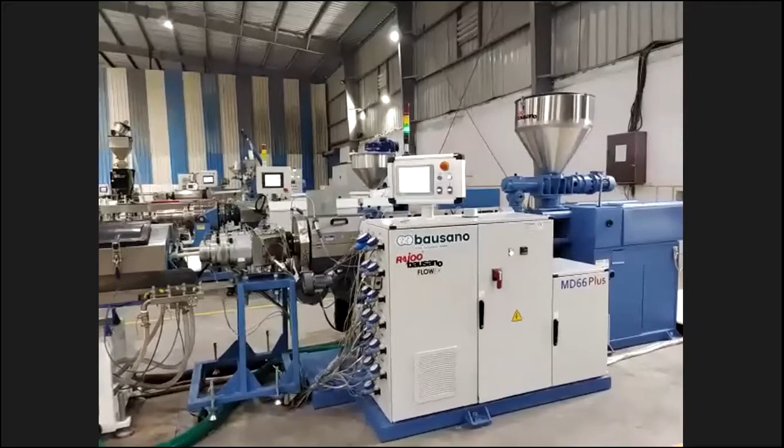Thank you very much, Milan. So here you can see a very advanced, highly advantageous power pack machine for PVC pipe plant. This machine model is a Flowex RBMD 6630 with a dual exit die head of 63 mm. At present, we are running CPVC material. The running size is 3/4 inch. Screw diameter for this model is 66 mm and L/D ratio is 30:1.

So let's understand the various features of this machine. Before moving further, I would like to take you to the most important features of this product. Rajoo Bausano machines are equipped with world's most advanced and patented gearbox technology, which is called as multi-drive gearbox. Let's have a small animation video of this technology for better understanding of the advantage of the same.

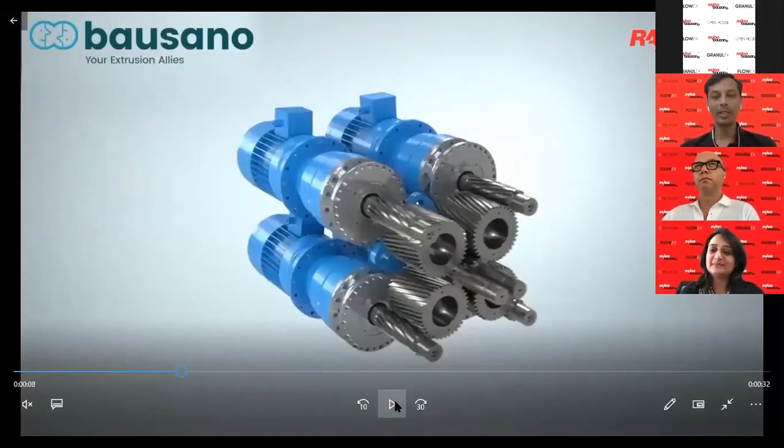Before any explanation, I would like to tell you that Rajoo Bausano can offer machine output range from 200 kgs per hour to 3.5 tons per hour. So when we talk about output range from 200 kgs per hour to 500 kgs per hour, there will be two motors mounted on the gearbox. And when the output range will be above 500 kgs per hour up to 3.5 tons per hour, there will be four motors mounted on the gearbox.

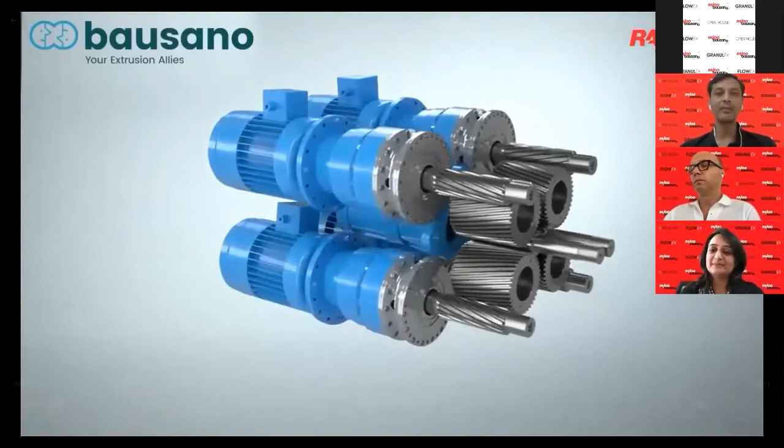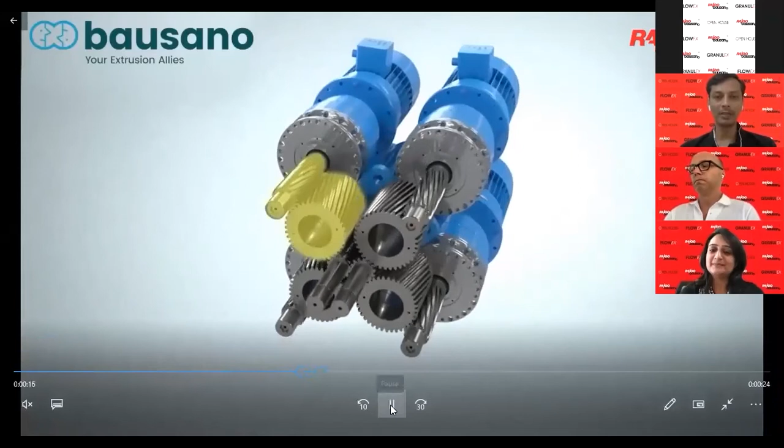Here on the screen, you can see that there are four motors directly coupled on the gearbox. When it will be in operating mode, the torque will be equally distributed among all the four motors, and thus there will be more power available on the screw.

Also, the torsion effect on the command shaft will be completely eliminated, and that way the possible wear and tear will be reduced between the screws and the barrel. It will help this way to increase the service life of the critical components like screw and barrel. Also, it will give a very higher useful life of the gearbox itself compared to traditional one.

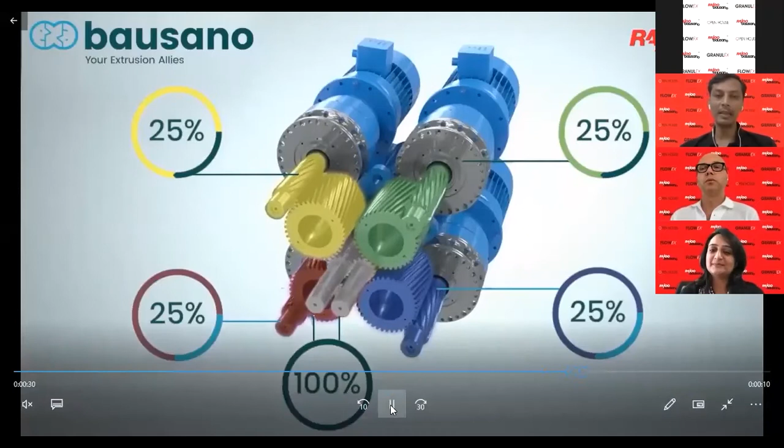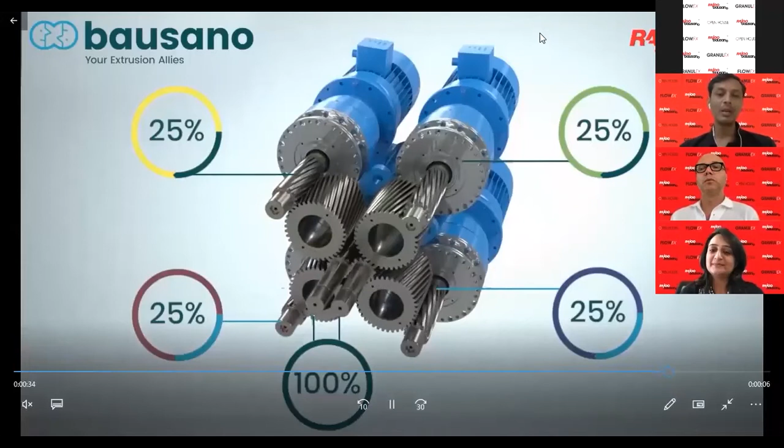And it is indeed a biggest advantage of this kind of gearbox. Also, the multi-drive technology gearbox will help us to reduce the power consumption, not less, but up to 40%, which is a perpetual saving in revenue expenditure, and it will ensure a quick payback time. And these are the really big advantages to offer for a Rajoo Bausano machine.

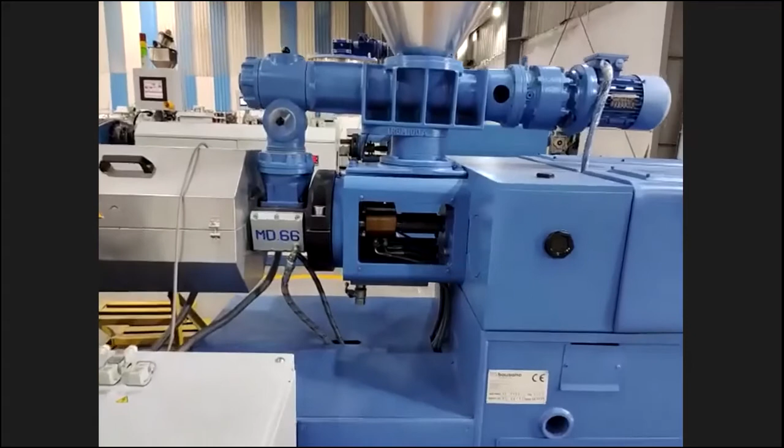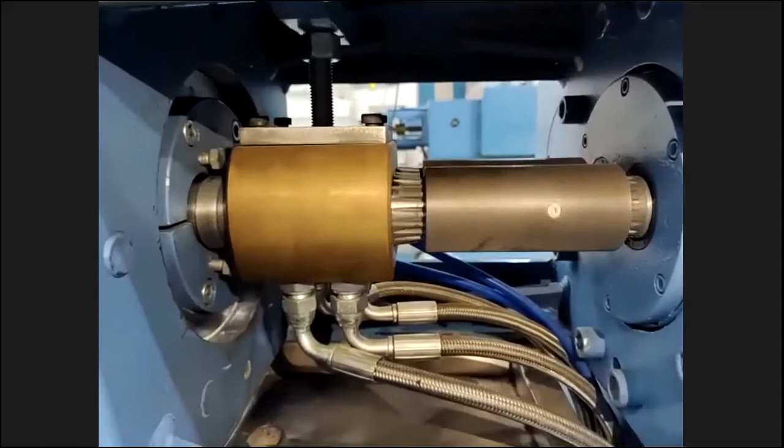Next to that, we have another technology of screw thermocontrol unit. On the screen, you can see a part of screw thermocontrol unit where silicone oil will be passing throughout the screw tip and will give the excellent control for the melt. This kind of screw thermocontrol unit feature is very essential when we talk about critical and sensitive material like PVC or CPVC.

And when it will give a better control to the melt, you can obviously run a wide range of formulation. Of course, when I say a big range of formulation, that means you can make an economic kind of recipe for your product and you can save a lot on the raw material cost. These are the biggest advantages we can achieve out of this kind of feature.

Here we have seen two different technologies. One is a multi-drive gearbox technology where we can save a big amount of power, electricity consumption. Also, this gearbox will help us to increase the service life of screw, barrel, and gearbox. The other technology we have gone through is a screw thermocontrol unit where we can save a lot on raw material cost.

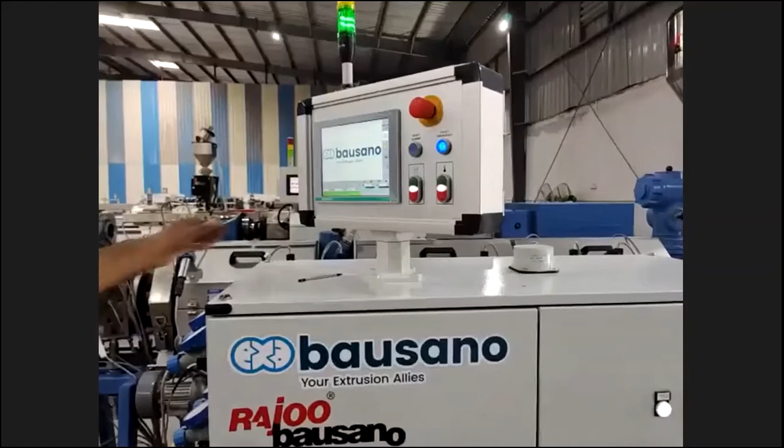Moving further, this extruder with 66 mm and 30 L/D ratio has screws designed with very advanced design, and it can provide a much higher output with optimized power consumption. This machine will be operated with the multifunctional touchscreen panel control. The screen will be movable so that the operator can adjust it according to his convenience.

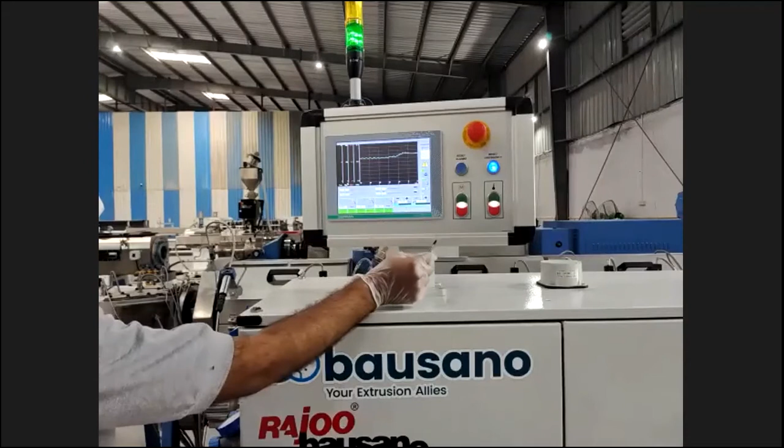Also, this screen is full of various useful and important features, like a processing graph where you can see the machine behavior with the kind of formulation you are running or the material you are processing with this machine. We can always observe the behavior of the machine and have a view on various kinds of parameters.

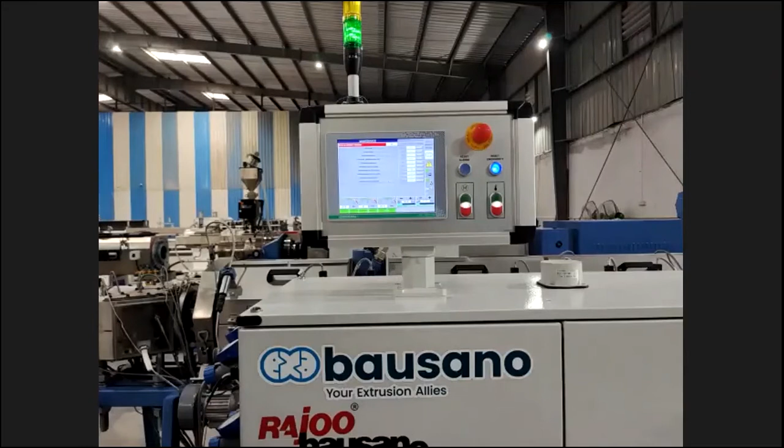Also, we have a maintenance chart so the machine can give us an audio-visual alarm for various important maintenance parts, like an oil change or a filter change, and many other features. Also on the screen, one can see various parameters like melt pressure, back pressure, and ampere of the motors.

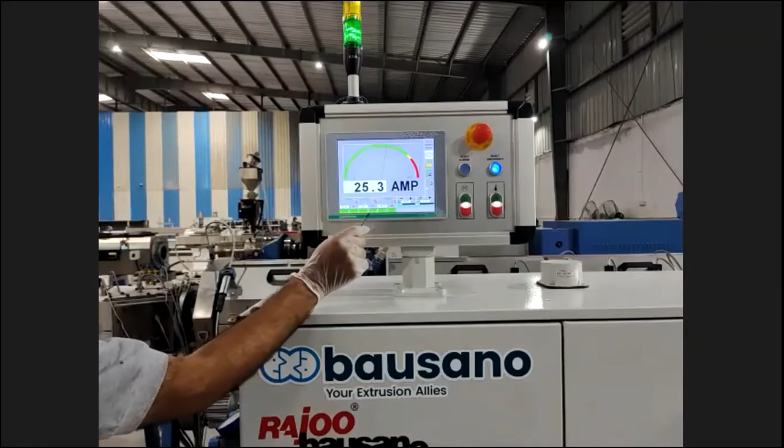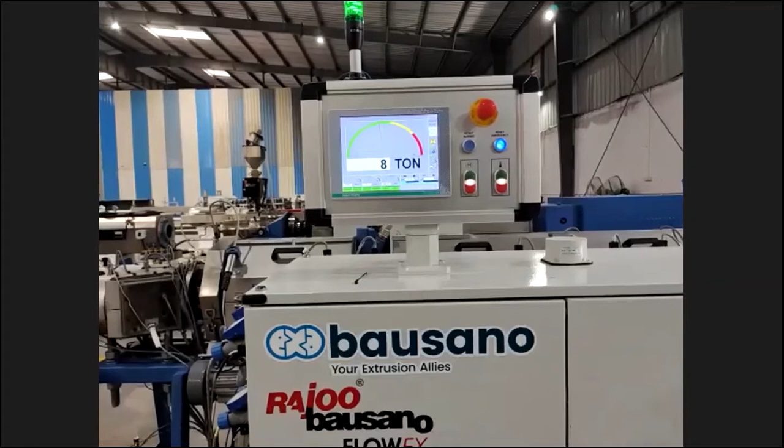Milan, if you can show us the back pressure. This is again a unique feature of this machine: we can actually measure the back pressure coming on the gearbox through the screw, so that we can have control on the back pressure, or control the mechanism, the parts of the machine, to provide better mechanical safety for important parts of the machine.

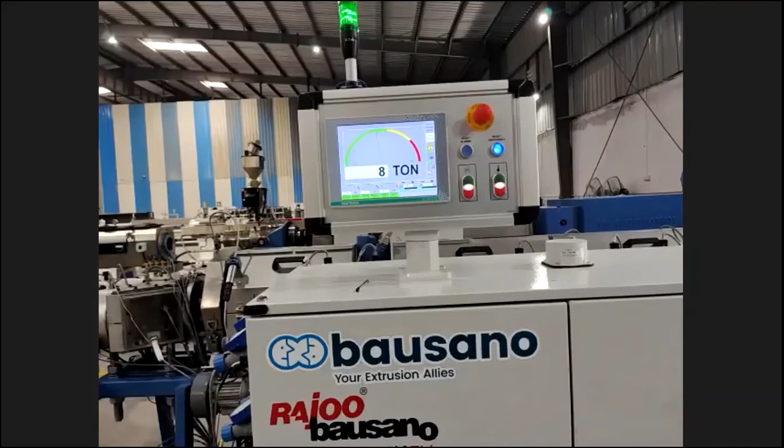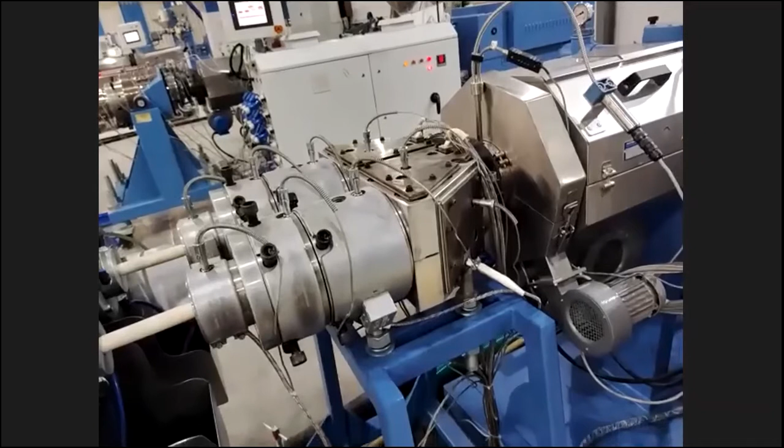Further, we can move on to the die. This die is for CPVC. The die size is 1/2 inch to 2 inch. This die is designed to produce the optimized pressure for the CPVC material and to get consistent production and achieve the finest quality of pipe with better mechanical properties. We have provided stainless steel made spiders so that consistent performance can be ensured.

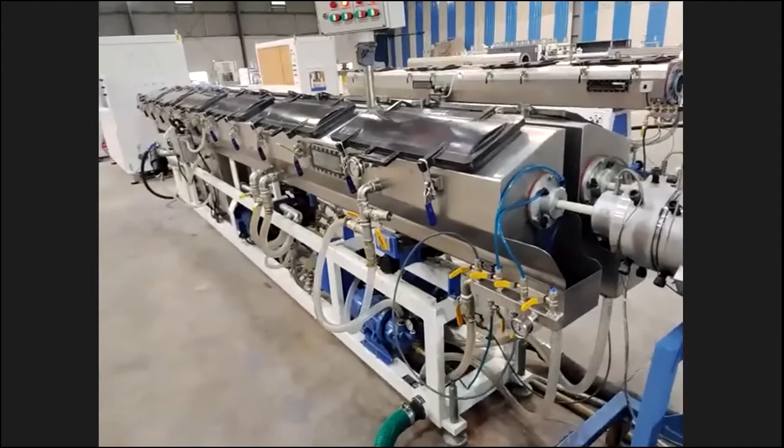Further, you can see 2 individual working vacuum tanks. These tanks are made out of stainless steel and are totally independently workable, so the operator can control both sides of the pipe very easily. The arrangement of the spray nozzles is very efficient. It can provide very good cooling to the product, and it will help us achieve a higher output from the machine.

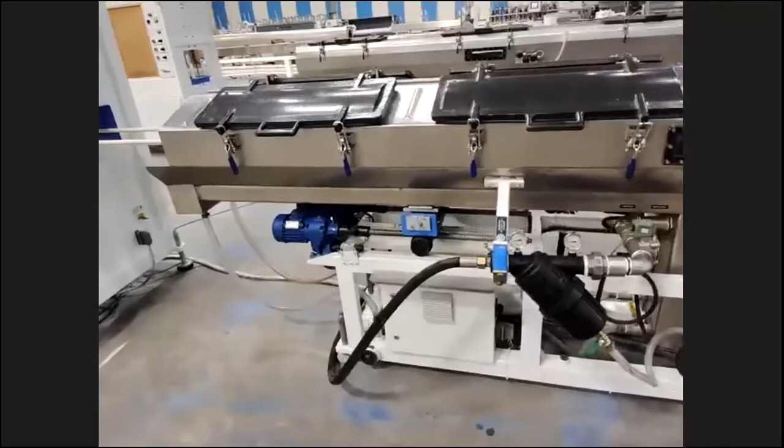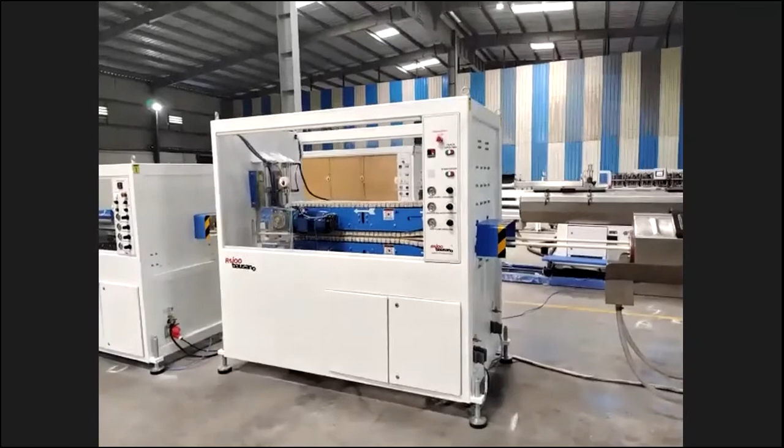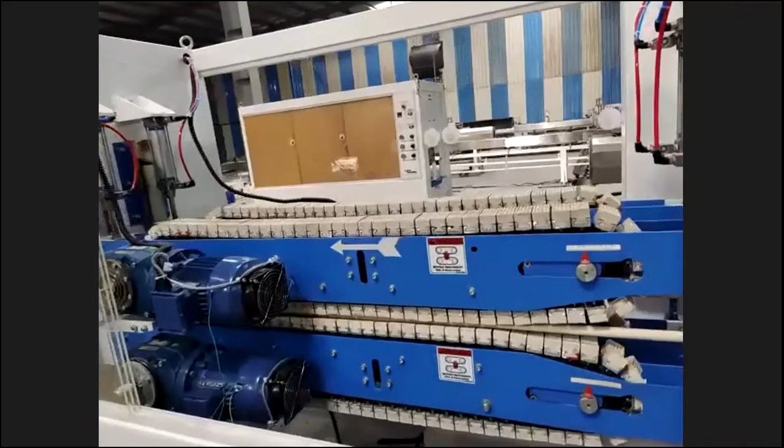There will be better space inside for handling purposes. Next to that, we have 2 independently workable haul-off units. Here you can see 2 separate tracks so that both sides of the pipe can be operated separately. We can provide an AC or a servo motor according to the application requirement.

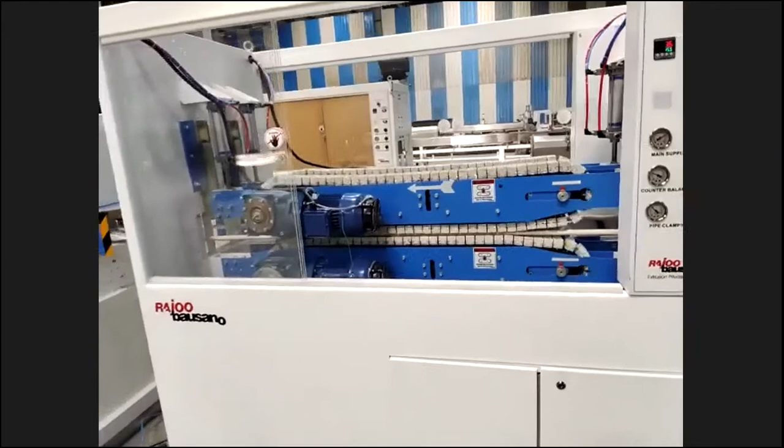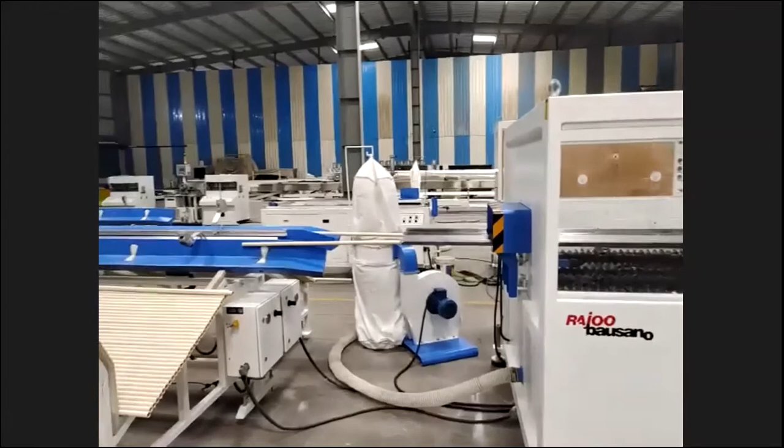Next to that, we can see 2 independently workable cutting units. It is a sturdy and high-speed cutting unit, and a smooth cutting surface will be ensured. At the back side, we have provided a dust collecting system so that the cutting unit as well as the shop floor will be completely dust free. There you can see 2 separately workable tilting units.

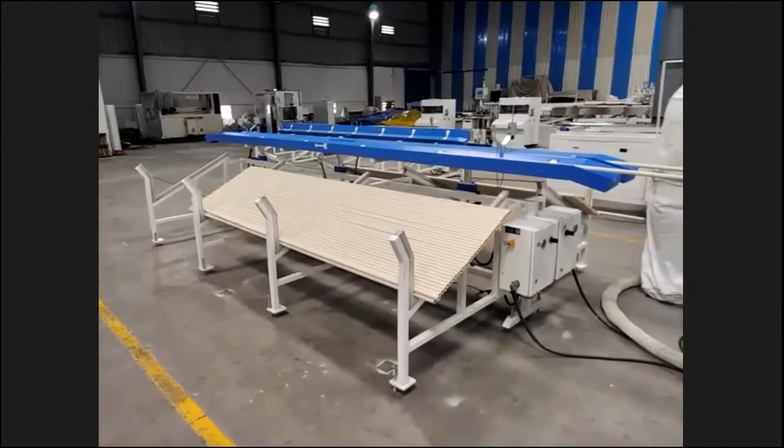Here we have seen a complete range, a complete line from Rajoo Bausano. This machine is the Flowex RBMD 6630. This machine is designed for UPVC and CPVC pipe.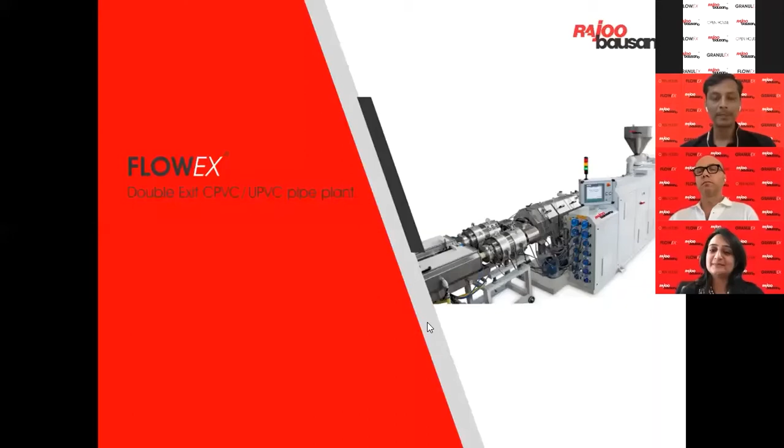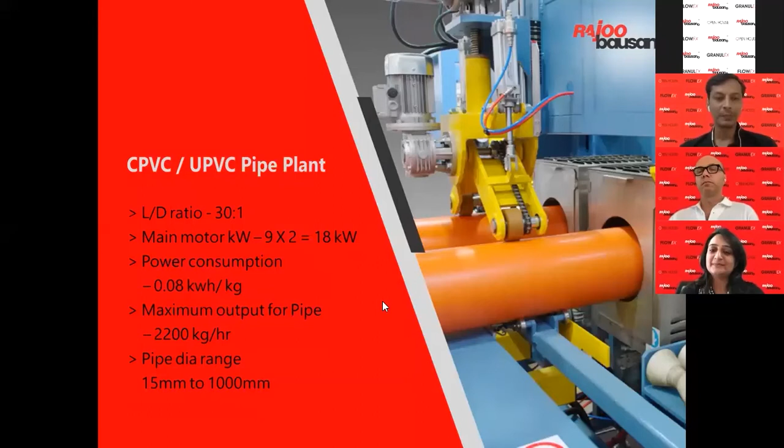When we run CPVC, the machine output will be 220 kgs per hour, and in case of UPVC, the machine output will be 325 kgs per hour. The power consumption of this line is 0.08 units per kg, which is the lowest in the segment. You can produce around 10 to 12 kgs of material with just 1 unit. If you convert it into money, 1 kg can be produced for as low as 56 paise. We can provide a maximum output range for the pipe plant up to 2.2 tons per hour, and the pipe diameter range is 15 mm to 1000 mm.

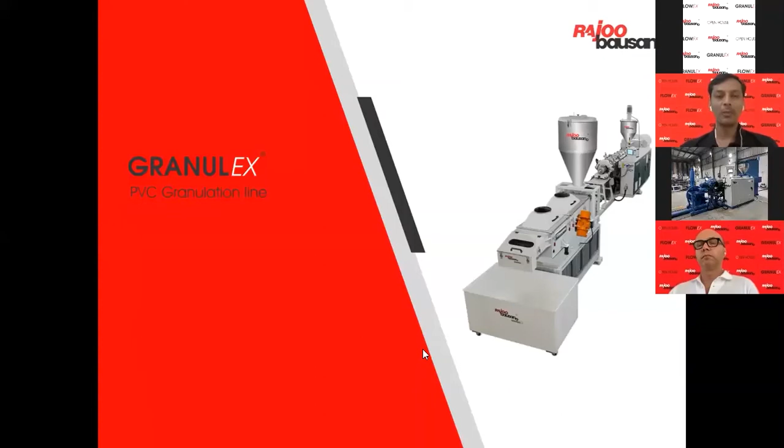So with this, let's move on to another state-of-the-art product of Rajoo Bausano, which is Granulex. Granulex is our specific range of product to granulate polymers like PVC, polyolefins, TPR, and many others. With this Granulex, we can provide an output range from 200 kgs per hour to 3.5 tons per hour.

The machine showcasing here is the model Granulex RBMD 66/30, designed for soft PVC granules. Machine output will be 300 kgs per hour. It is a 66 mm parallel screw technology with an L/D ratio of 30:1.

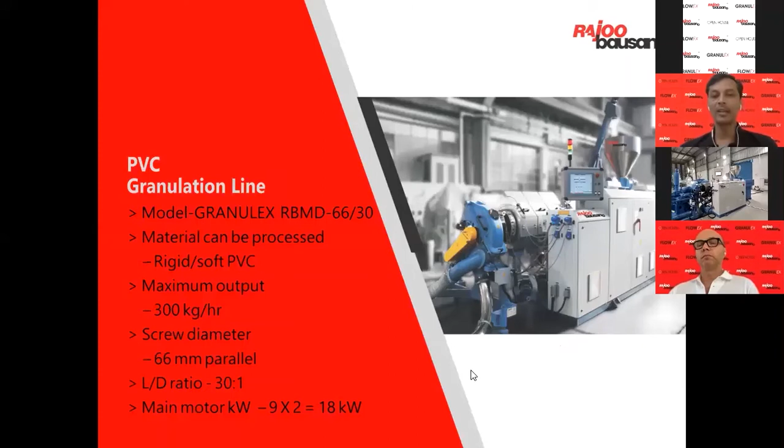As I said, we can offer the granulation line up to 3.5 tons per hour. The running line will have a power consumption of 0.08 units per kg, and in bigger output machines, we have observed power consumption as low as 0.05 units per kg.

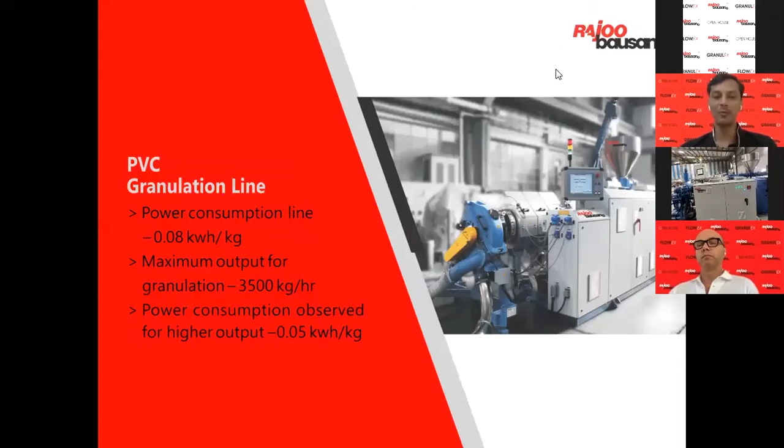Can we have a view of the shop floor? Yes, we can see here a granulation line model, Granulex RBMD 66/30.

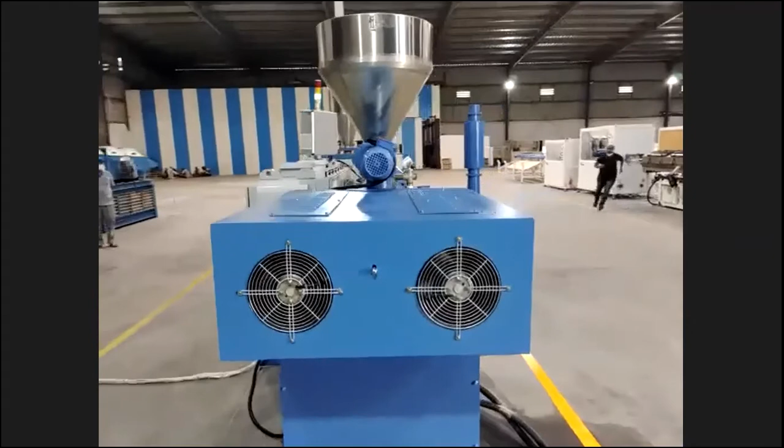As I said earlier, all Rajoo Bausano machines are equipped with the world's most advanced and patented gearbox technology, multi-drive. We have seen in the video that there were 4 motors mounted on the gearbox. Here we can see a smaller output machine; it is a 300 kgs per hour output machine, and we can see 2 motors mounted on the gearbox.

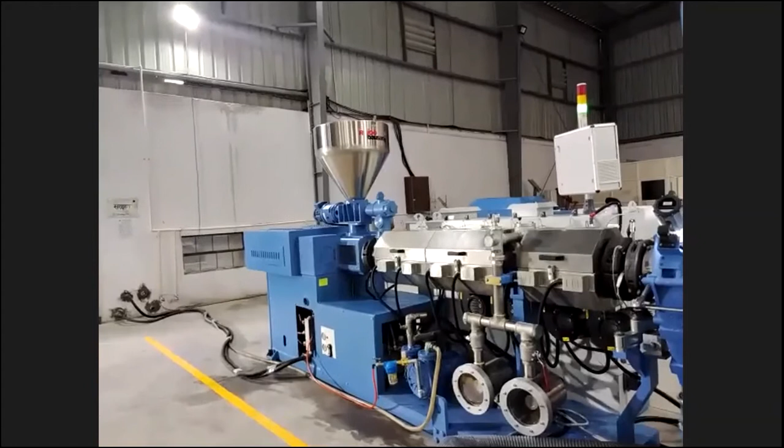There is a horizontal feeding system provided with a stainless steel hopper. According to the application requirement or customer requirement, we can provide various kinds of feeding systems, like a crammer feeder, or further feeding systems with volumetric or gravimetric feeding. The screws are dedicated and specially designed for each kind of application, to utilize machine processing capability by ensuring maximum production rate with minimum production cost.

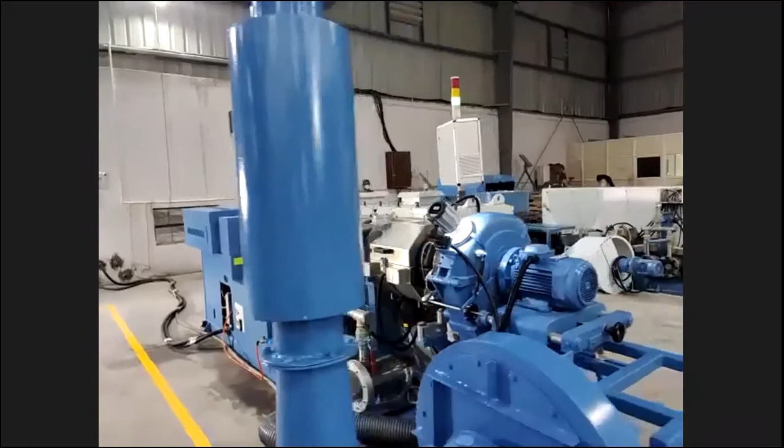As we mentioned earlier, Rajoo Bausano machines are designed to fulfill the demand of the time, to make the machine more and more cost efficient, and to make it a truly value for money product.

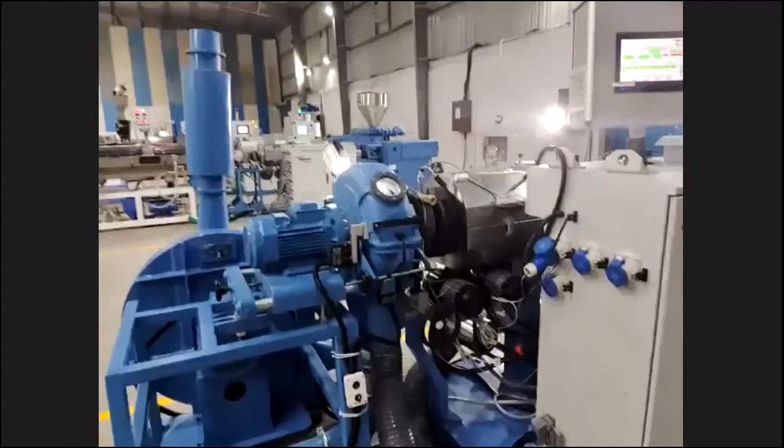Next, there is a die head made out of special alloy, and it is a coat hanger type die head, so that it can be removed and opened very quickly and reinstalled easily to ensure quick maintenance and quick restart as and when required.

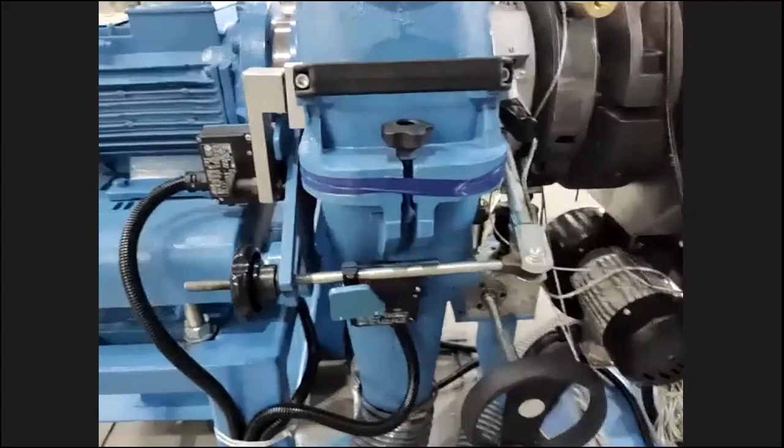The granules will be cutting through the die face cutter. Here you can see a high-speed die face cutting unit, and the granules will be conveying through the conveying pipe to the cooling unit hopper.

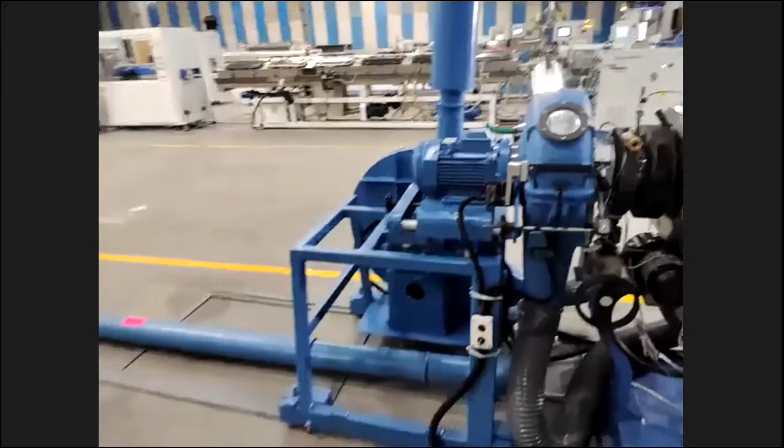This pipe is made of stainless steel and has a telescopic design, so that opening and operating can be very easy. You can see here a stainless steel made hopper. This cooling unit hopper and the stainless steel conveying pipe can be water jacketed as and when required, according to the application or the machine's production capacity.

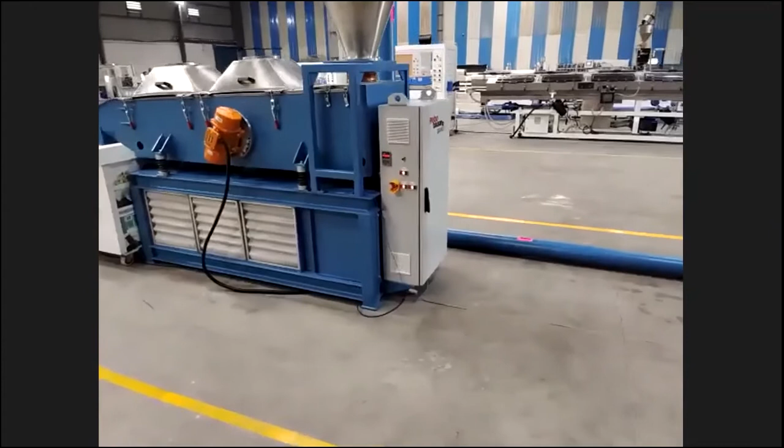Granules will further pass through the vibrating sieves, and there is a set of blowers installed at the bottom of the cooling unit. It will blow air upward and provide further cooling to the granules. In this entire process, we have ensured that granules will not be in contact with water so that they will be 100% moisture free.

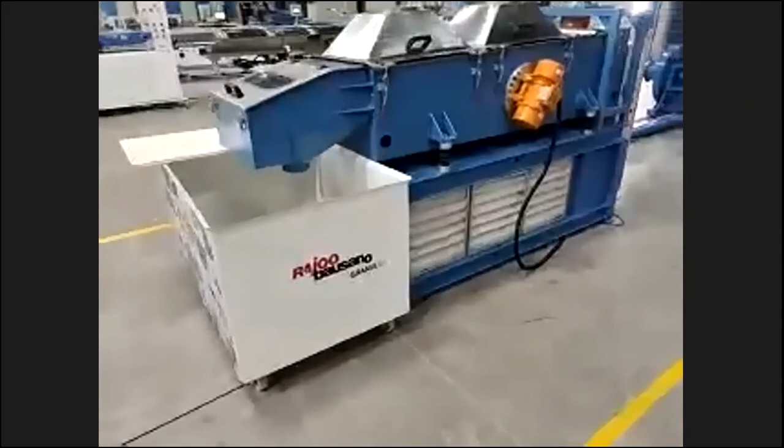At this point, we can see the granules. All the granules are absolutely stick free and in an even size. It is very important to be in an even size and stick free to get better results for the further process of granules.

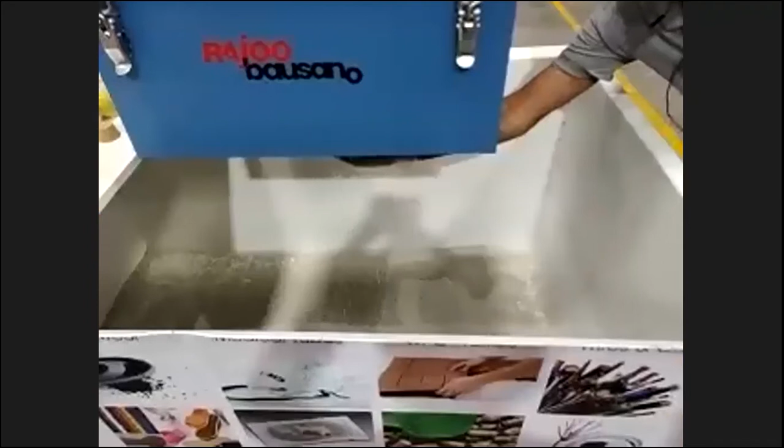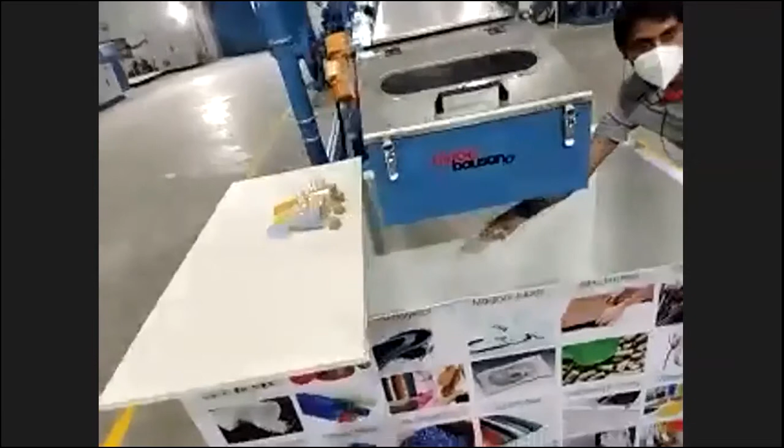So this is the complete package of various features like a multi-drive gearbox, screw thermo-control unit, specially designed screws and die head, and an efficient cooling unit. All these parts play a very essential role in ensuring superior product quality, high production, low production cost, low maintenance, and will ensure payback as early as possible, making this machine truly value for money.

Milan, can we have a bird's eye view? Since everyone is available with us on our shop floor through this virtual platform, I think it will be a good idea to have a bird's eye view, because at this moment our trial room is flooded with various machines.

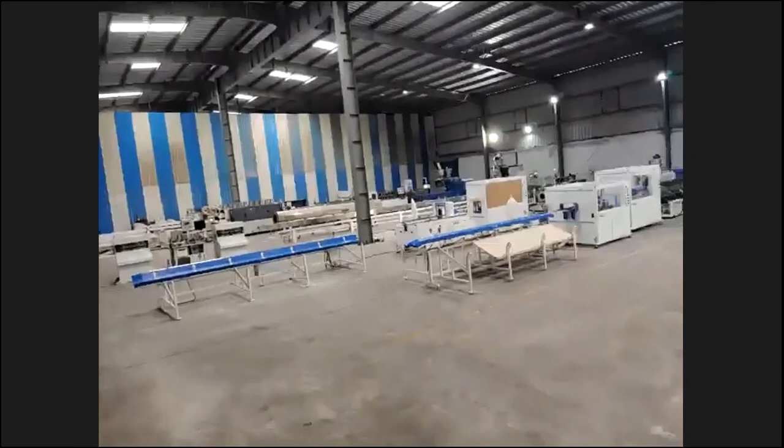On the first, you can see there is a WPC plant, which is a wood and plastic composite machine. It will produce PVC or WPC boards, and the application for the same is furniture.

Next to that, we have a drip irrigation line, which is a flat drip irrigation line, and it is a very high speed drip irrigation line for 150 meters per minute. The controls of this line will be servo control, since it is a very high speed line.

We have just supplied our HDPE pipeline, which is also very advantageous with a longer L/D ratio and lower connected load, or lower power consumption, we can say.

Next to that, we have a higher output line for PVC. Next to that, there is a UPVC and CPVC pipeline, which we have gone through.

Here we can see a granulation line, which we have just gone through. And another granulation line, which is building up, is a higher output line for 1000 kg per hour. So this is our trial room.